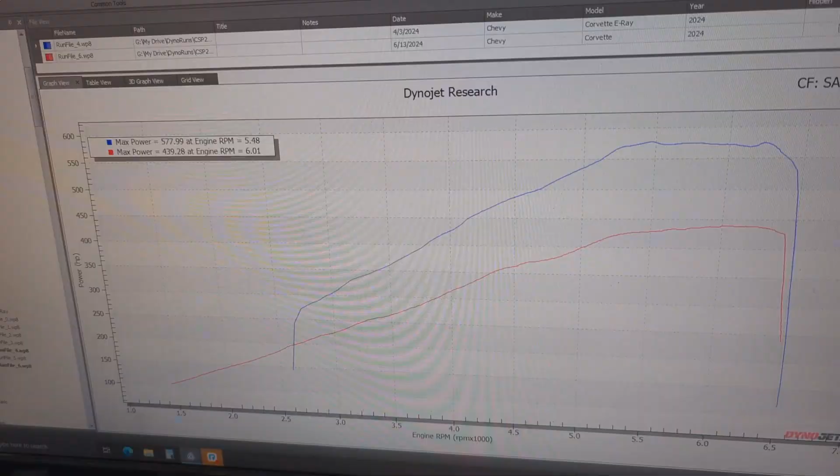Thanks to HP Tuners again for making this all possible. I've added 2 degrees of timing and taken a couple of the protection features out of the equation here, and we're gonna see if we can make some more power. You guys remember from the last video, our baseline was 439 rear-wheel horsepower as opposed to the 577 all-wheel horsepower. So the goal is to beat that.

So every flash that I make, it's going to re-enable ABS and then it's going to freak out. So I have to get to like 12 miles per hour and kind of hang out here until the ABS sensor fails. Then I'm free to move about the cabin. The way we test this out is if it goes into 4th gear, yes, we're good to go. Let her roll!

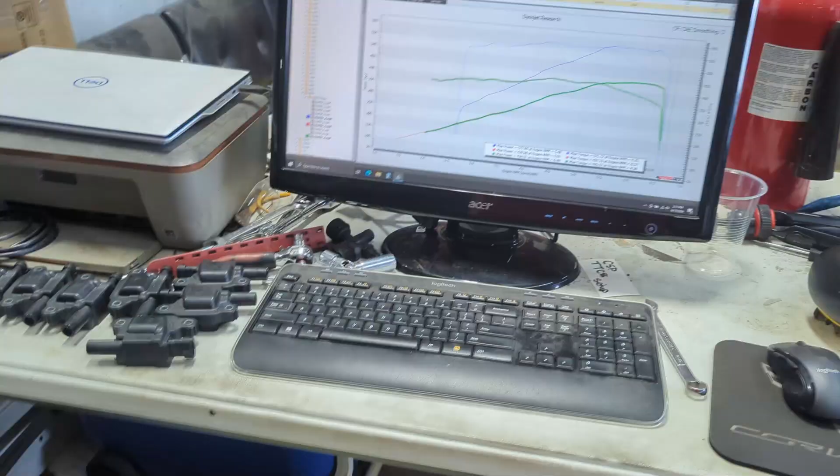Did you do anything? Did you do anything? No.

That sucks. Made 438 rear-wheel horsepower.

So it is a different day than when we got our baseline. What I'm going to do is reflash the factory tune to it, just on the off chance that different days and different weather conditions play into it. Since we have the ability to do it same day, I'm going to flash the factory tune back on this right now, and then we'll compare.

Okay, I've set her back onto the factory tune, which hopefully is not as good as the tune that I just made, because otherwise it just means their factory did such a good job that there's nothing you can really do from just the tune.

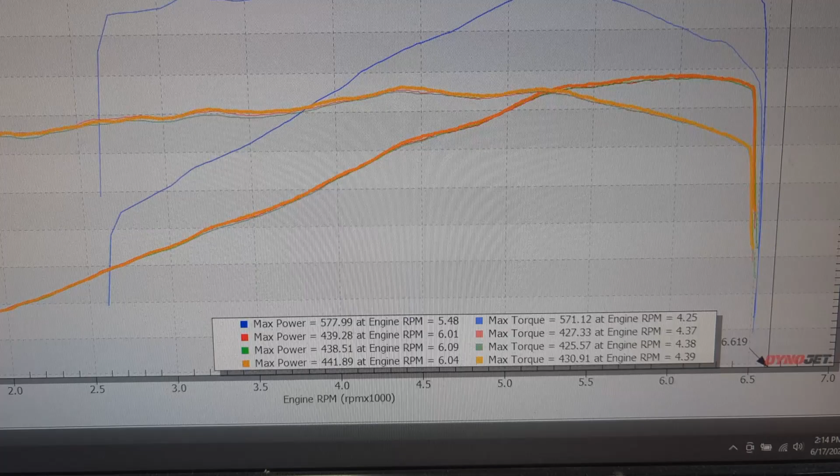Okay, back to my tune. See if anything changes with just 2 degrees of timing in it and a slight fuel modification.

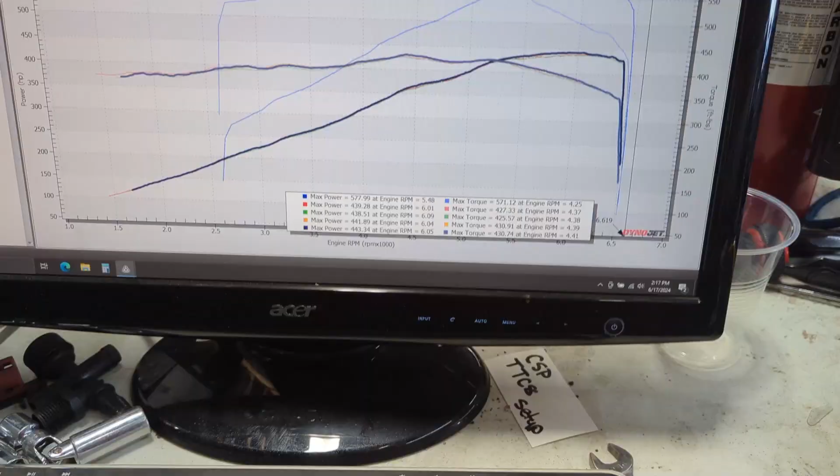Horsepower. Okay, so tuning, you might gain like 2 horsepower. Ah, that's horrible. I don't know that it's worth the risk for 2 horsepower over factory.

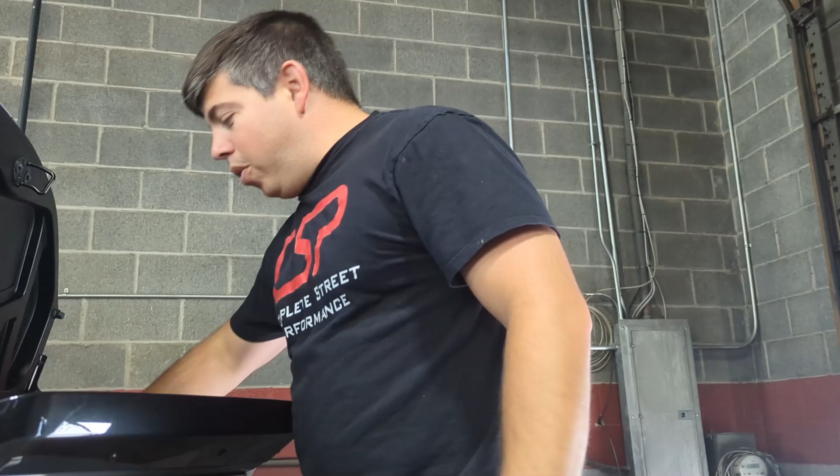So, well, let's test this filter. Okay, so step 1 is we got to get this stuff out of the trunk so we can get to the airbox, which is through here.

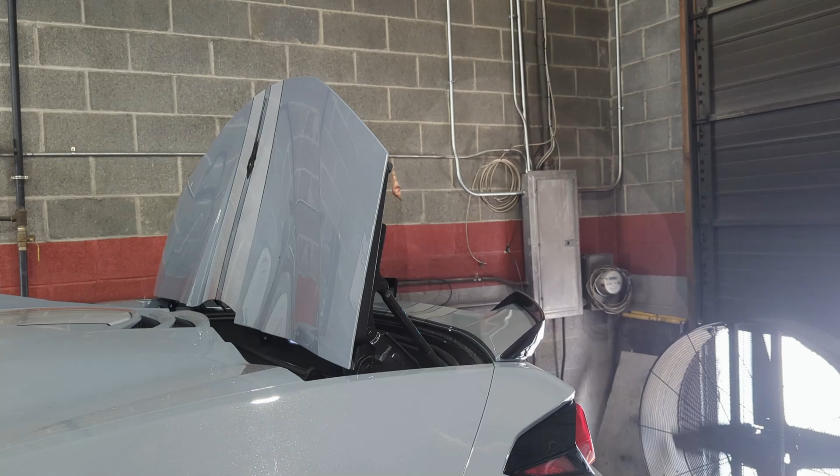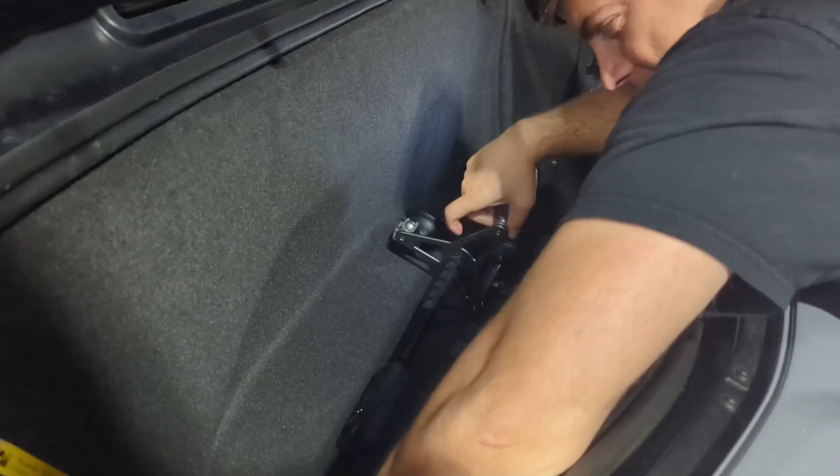Oh, look. It's Grandmama's invisibility cloak. Huh, forgot I had this one too. This is actually funny. I won't throw that.

Alright. Wow. You can tell I just dynoed it because it's hot as balls back here.

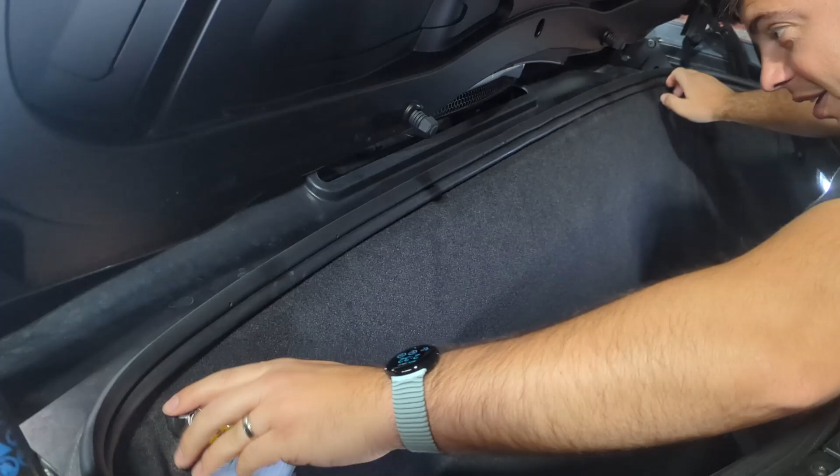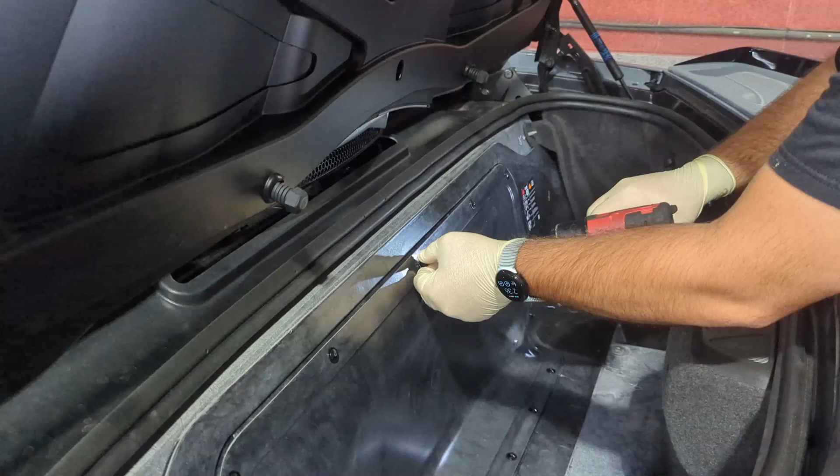Gonna scratch the paint. One thing I really like about the E-Ray, which I thought I wasn't gonna like, is that the wing looks good and you can actually get over it. I really liked the high wing on my previous models, but I really dig being able to get into the trunk easily and not screw everything up.

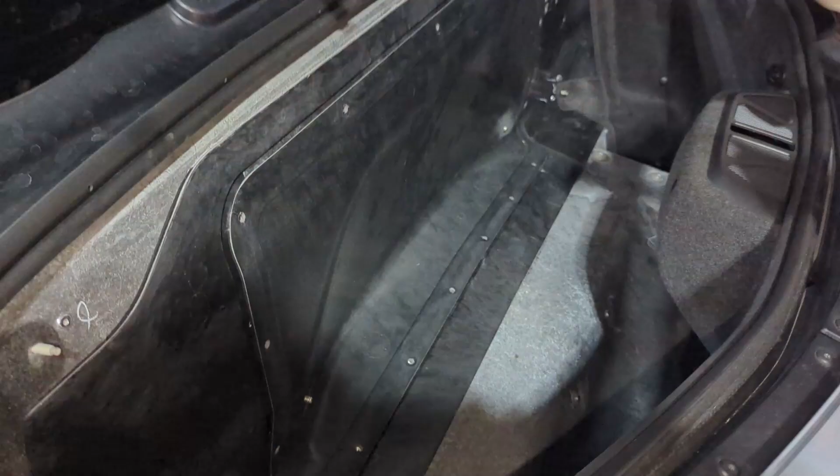So just 6 of these 8mm bolts here. 1 and number 6.

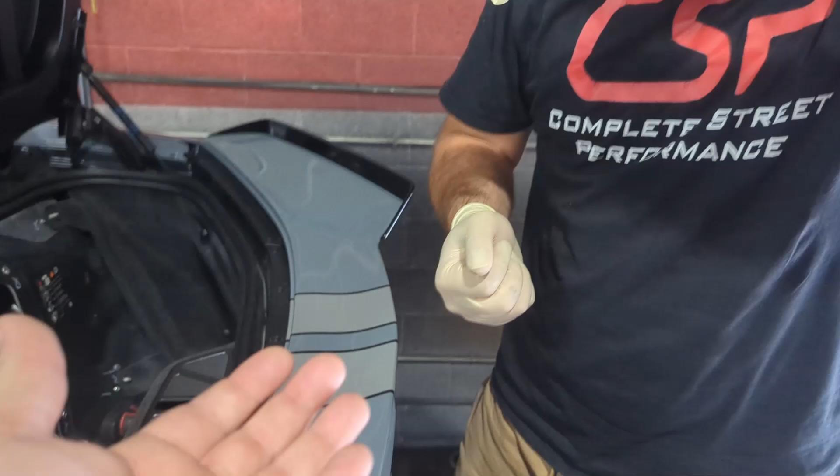That's a slightly different design. They're pretty hot now. See what it looks like side by side.

So like any job, we need to verify that the contents are actually here. We're going to be installing this AFE power filter here and testing if there's any gains.

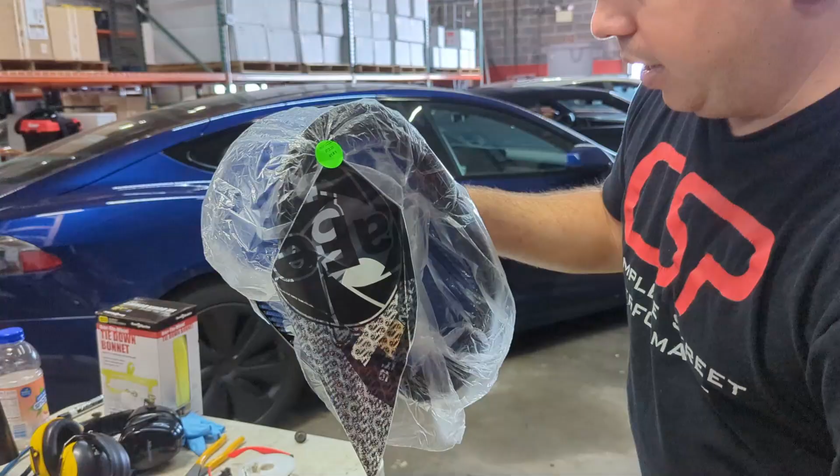And it does appear to be here. It's a little different than I expected. The factory filter actually, I believe, is sealed on one side, whereas this is more like a carburetor.

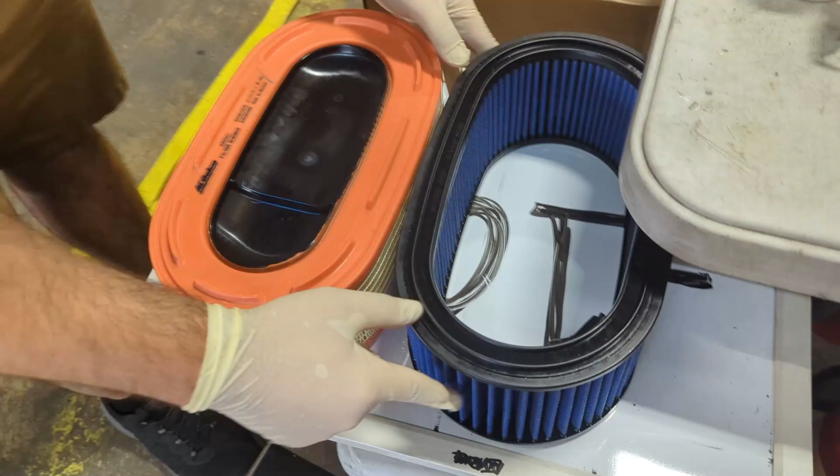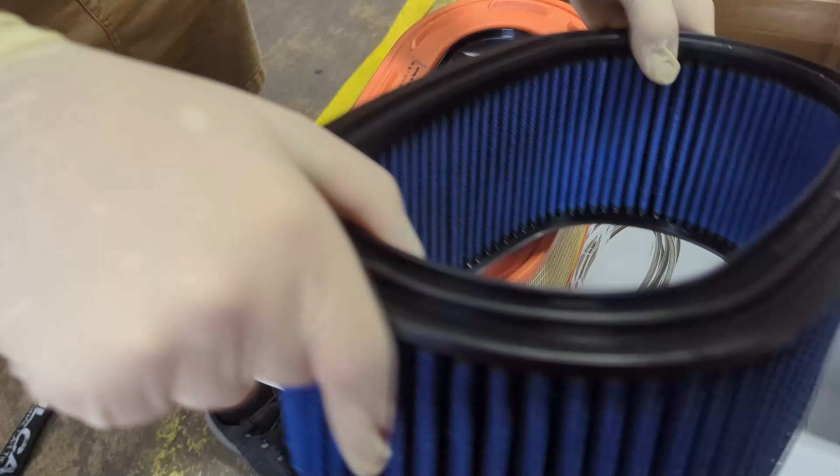Look at that, side by side. It looks like the AFE is a little bit taller, probably because it's got to reach the actual lid. It does not appear that this gets installed any directional way. It looks like it's the same on both sides, so I'm gonna plop her in and see what happens.

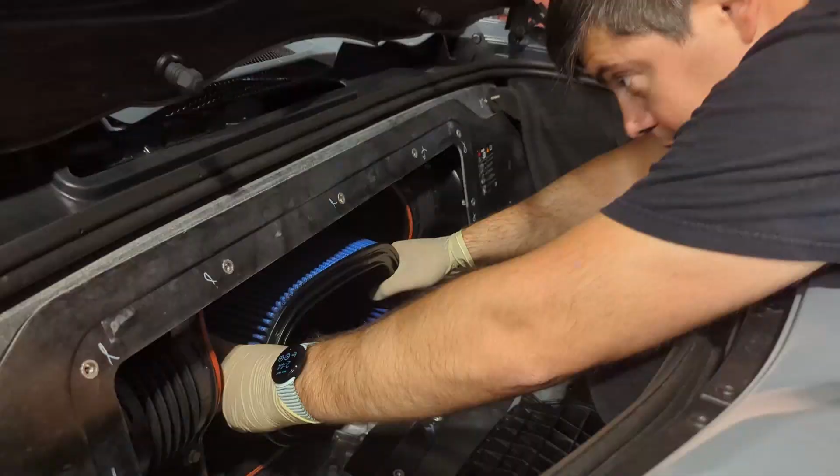Kind of go snug around that. And now, fun, put this back in.

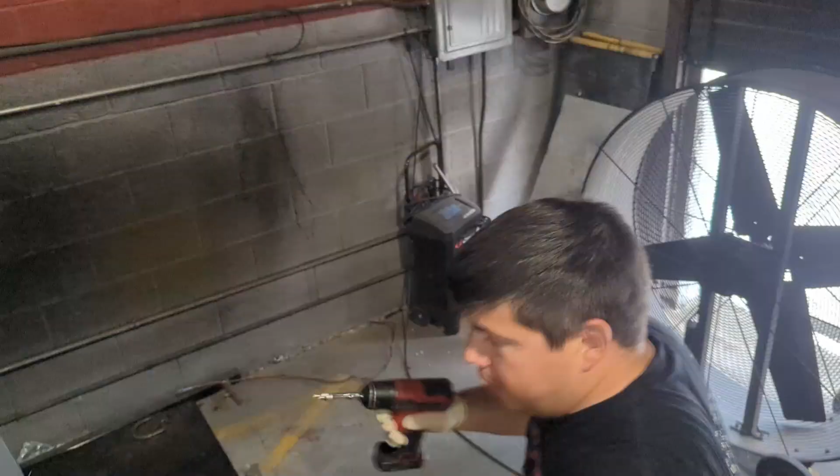So I know some people are going to be like, oh, all I did was install an air filter. But why are we doing it? To test. Is it worth it? Is it not? The only way we're going to know for sure, because I don't trust anybody, is to do it myself. Hey, let's find out if it adds anything. What do they say it adds? I don't know, I didn't look. I never look at that stuff because most of the time it's a lie. So, find out in our own experience.

So anybody installing that may want to rethink it. What do we lose, 20? 13. 13, wow. For good measure, we'll run it again.

So is this on your tune or the factory tune? This is on my tune, but it shouldn't matter.

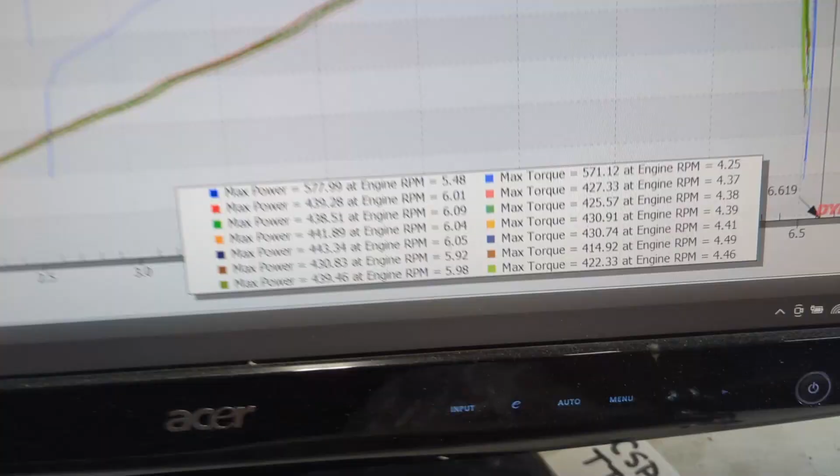We gained 9 horsepower back. But it's still below the factory. Yeah.

I wonder if it's like that test we did with headers back in the day where you had to run it X amount of time. Well, there is a learn factor, and this definitely changes some airflow. In fact, I'm seeing that we're not adding as much as we were prior to this. I don't know, I think the factory outperforms it. Give it one more, but I think that we're going to take this out and keep the factory one in because no gain, maybe a loss. Or we take all of it out and we put turbos in it. We got to do other things first.

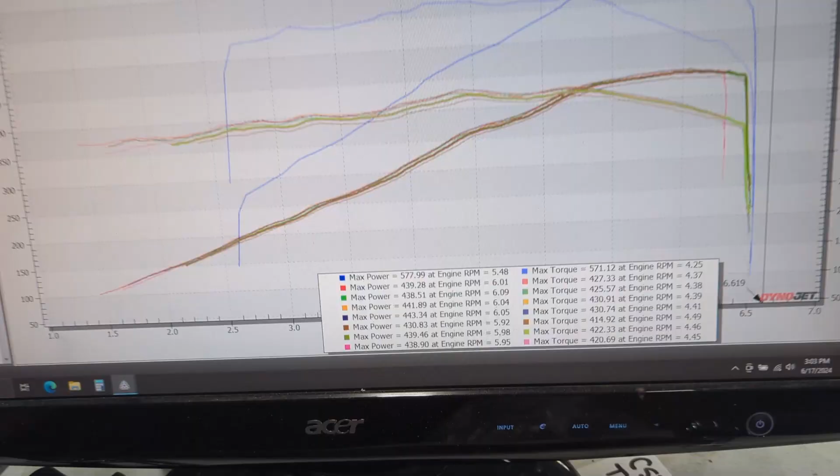Okay, well, we're going to say that the factory intake filter is better than the AFE. And that's a shame because people have put this in their cars and expected to gain and probably found themselves with a loss. There's been other things we've tested in the past that have come up as a loss, unexpected loss, and it was always blamed on tuning. But now we don't have that issue. We know that we can tune these things. And we should be able to get around it, but we're not. That means that it's a mechanical limitation that we're running into.

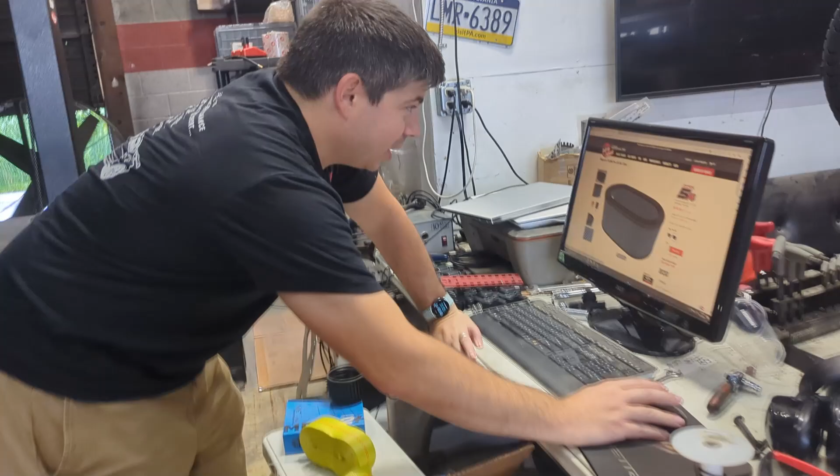So now, since we decided to test our own, look at this - adds up to a 27% flow increase. It doesn't make any mention of horsepower. This is direct from AFE's site. And yeah, that's what I have here. What's the airflow chart say? Airflow chart - this is misleading.

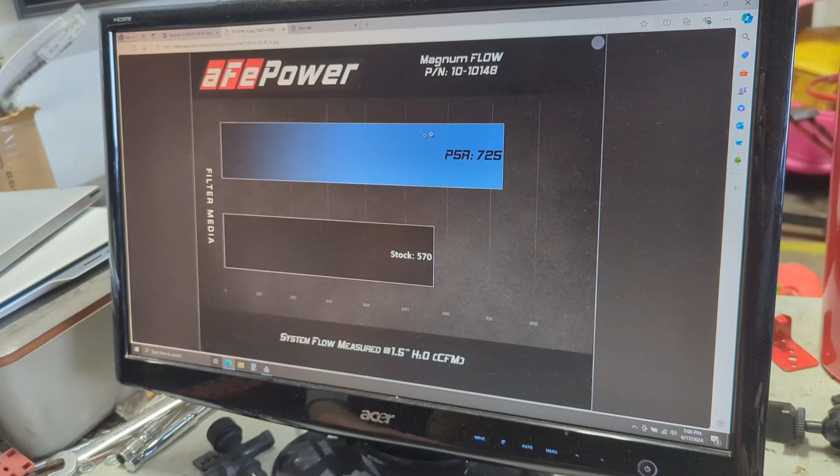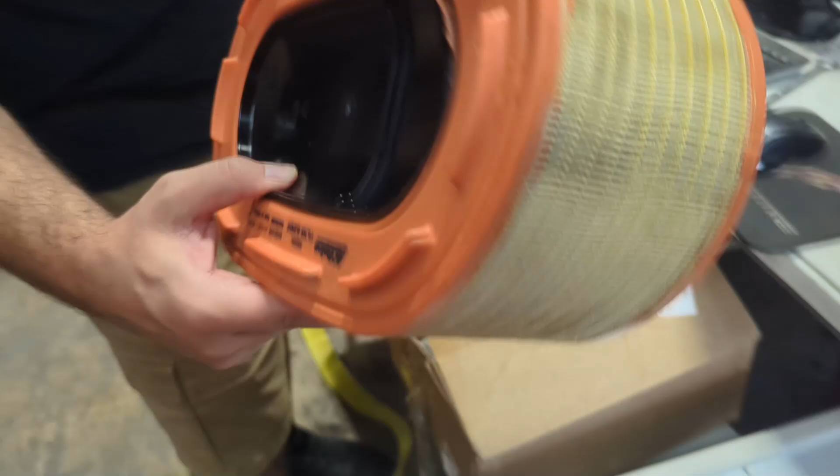But yeah, I mean, to lose power, I can't imagine it having better airflow. A 27% increase - I hate stuff like this. This is why you can't trust anything. This is why I do these tests, in order to know that what we're installing on your car is actually worth installing. And frankly, it seems like the factory AC Delco filter, for whatever reason - maybe the center divider, maybe the fact it's sealed here, maybe these things - don't know which one, but it performs better than the aftermarket AFE is.

And not sponsored - you paid for that intake. I did pay for this intake, yeah. I'm not sponsored. This is not a sponsored video. I didn't get anything for free here. I paid for all of it, so this is a real test, and it's a real piece of junk.

So guys, today's video is not a video that I actually like to do. I don't actually want to go out and pick fights with companies. Like AFE, I have no problem with AFE. In fact, we use their intakes on a lot of things. It's just this one had a really big misleading advertisement saying 27% more flow, and it's something that I expect to gain. Seeing a loss over the factory intake, it's like 27% more flow than what? And it could be that maybe it does flow better and there's just turbulence, but honestly, if that's the case, if your product's going to perform worse than stock, it's probably not worth selling the product at all. And it's one thing that I hate in this industry is people making bogus claims, people doing misleading advertisements, saying this, that, the other thing. Sure, there could be a range. Implying that there's going to be a gain and there's not just really rubs me the wrong way.